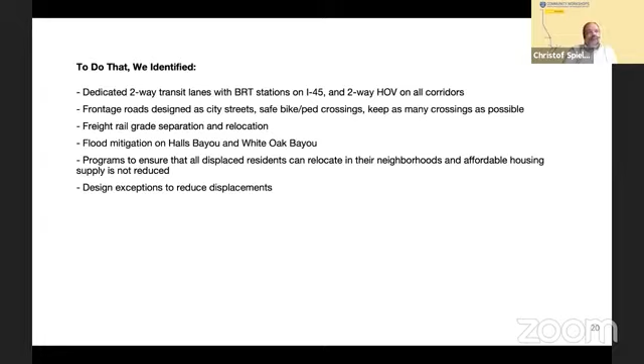That said, having done all of that, we set out to reduce those impacts, increase those benefits. We concluded that we could not do that simply by refining the project. If you look at the draft environmental impact statement, it stated that all alternatives would cause disproportionate high and adverse impacts to minority or low-income populations. And those are directly as a result of the widening of the highway.

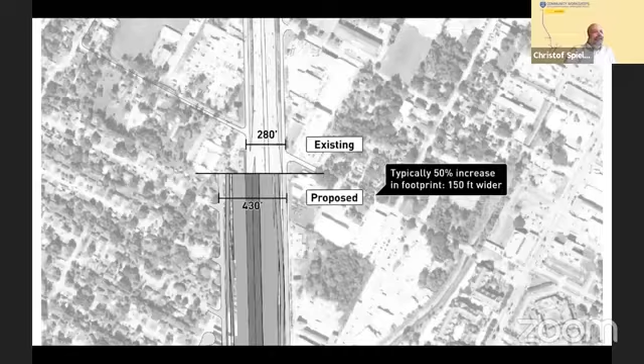This is a project which would significantly widen the freeways that it touches. In segments 1 and 2 north of downtown, typically a 50% increase in footprint. That's 150 feet of additional highway width. And that directly leads to significant displacements.

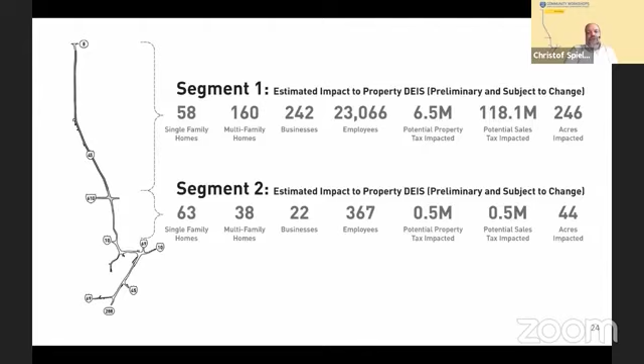These are the DEIS numbers. You can see segment 1, 58 single family homes, 160 multifamily homes, 242 businesses with a total of 23,000 employees. Segment 2, 63 single family, 38 multifamily, 22 businesses. These are very significant impacts that are due directly to the widening of the highway.

And we asked in that second round of public meetings, what's your preference for capacity and cross-section? And what we heard as an overwhelming response was the public saying, we want you to look at alternatives fitting within the existing right-of-way of this highway.

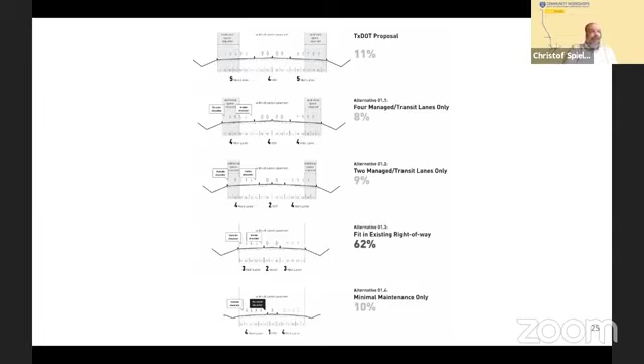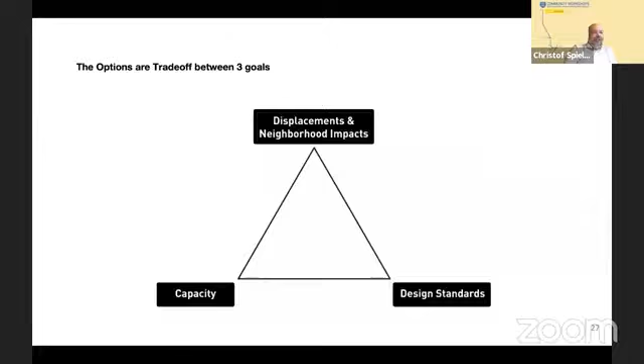So we looked at multiple options for doing this, and all of them ultimately come down to a trade-off between 3 significant goals. One goal is adding capacity to the highway. One goal is bringing the highway up to current design standards. And one goal is minimizing displacements and neighborhood impacts. If you look at TxDOT's statement of goals, their primary goals here are adding capacity and increasing safety, which is taken to mean bringing the project up to current design standards.

We came at this saying there is really a third goal here. It is protecting and enhancing neighborhoods. And what we did based on all of this input is say, what version of this project does that? And we think there's an alternate vision for segments 1 and 2 that can accomplish all 3 of these things: increasing the capacity of the highway, increasing safety, and having minimal displacement.

So first of all, how do we increase capacity? First of all, rebuilding interchanges is an increase in capacity. Every time you have a left hand on an off ramp, every time you have merge lanes which aren't long enough, every one of those serves as a sort of bottleneck on the entire system. So bringing interchanges up to modern standards increases capacity.

Secondly, rebuilding on and off ramps so that there are, once again, proper merge lanes, good geometry for those on and off ramps increases capacity. Adding shoulders increases capacity, especially if there is a crash and cars are able to pull over on there. We know that segment 3 serves as a bottleneck for this entire network. So segment 3 can actually help capacity in segments 1 and 2.

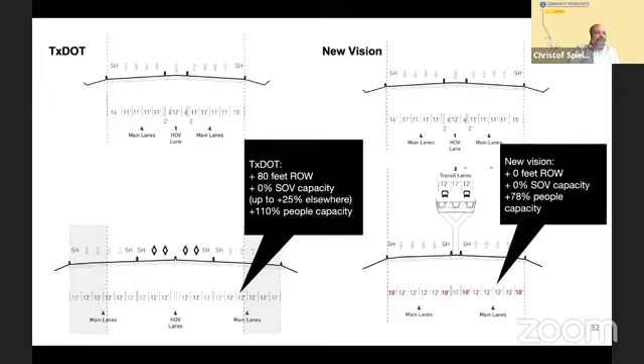And part of that is thinking about those lanes in the middle. We think that looking at transit-only lanes as opposed to HOV lanes, as opposed to managed lanes, can lead to more reliable transit service, can lead to simpler on and off ramps. It makes it simpler to add stations along the way so that the neighborhoods benefit from that transit, and it can be built at lower cost with less right-of-way.

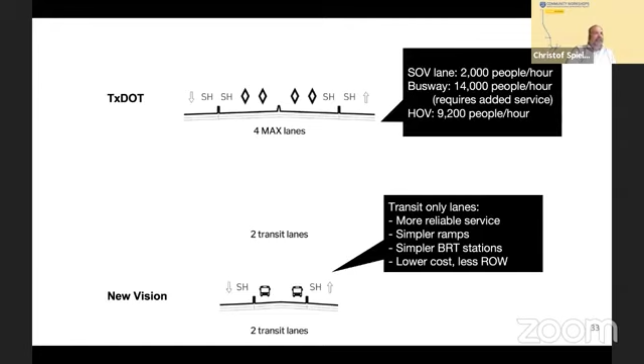But this vision isn't just about what happens with the highway main lanes. It's also what happens next to the highway. We said that the frontage roads along I-45 should be seen as parts of the neighborhood rather than as parts of the freeway. That means they are designed to city street standards, not highway standards, that they have safe pedestrian and bike facilities, not bikes sharing lanes with cars, that they have more extensive landscaping,

and even that sound walls are located next to the main lanes and between the main lanes and the frontage roads rather than between frontage roads and houses, which clearly makes those frontage roads part of the neighborhood and also means we have fewer gaps in those sound walls, which means they can be more effective.

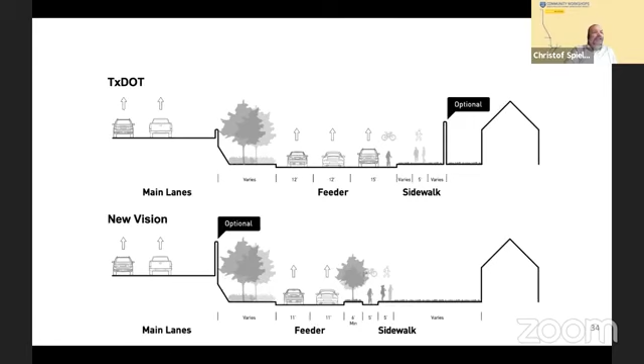And so that is the vision that the mayor's letter puts forward. Keep the current number of main lanes in segments 1 and 2. Replace the current reversible HOV lane with two-way transit lanes. Add intermediate BRT stations so that the neighborhoods along the way benefit from that new transit service and so that local bus routes can have connections to that BRT.

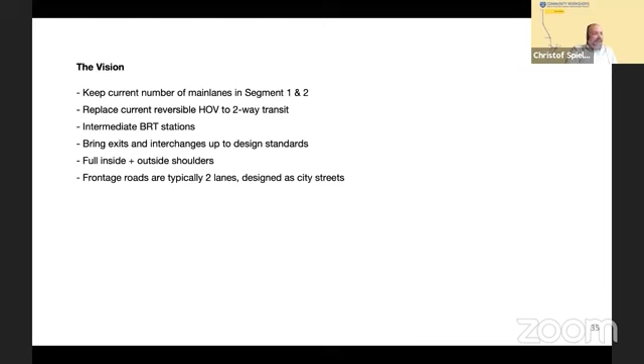Bring exits and interchanges up to design standards, provide full inside and outside shoulders, and have the frontage roads typically be 2 lanes designed as city streets. So looking at that vision, how does that compare?

Ultimately, it does not provide the same vehicular capacity that the TxDOT design does, but ultimately can provide more person capacity. Without that vehicular capacity, it will not do as much in terms of travel time for cars, but it does more for transit reliability. Both versions can really address the freeway flooding.

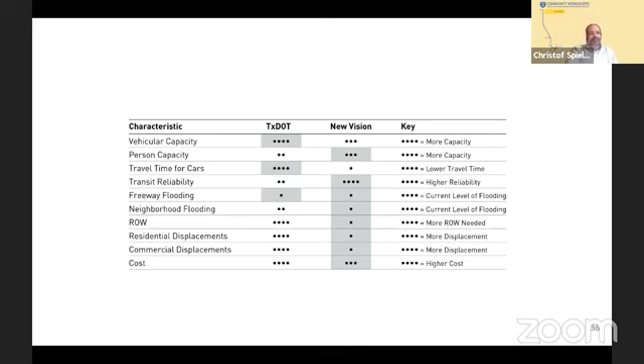We think ultimately widening the freeway less and incorporating more flood control features as part of the highway can mean that we can reduce neighborhood flooding as well. And clearly, this alternate vision uses less right-of-way, fewer residential displacements, fewer commercial displacements, and ultimately would be a less expensive project to build.

And if we look at the goals that TxDOT started with, we would argue that this actually addresses those goals, though sometimes in different ways. That when we're adding capacity, if we think of capacity in person capacity rather than vehicle capacity, this is actually a way to add capacity. So we think this alternate vision is a project which would be a significant improvement over the current highway, as well as an improvement over what TxDOT has proposed.